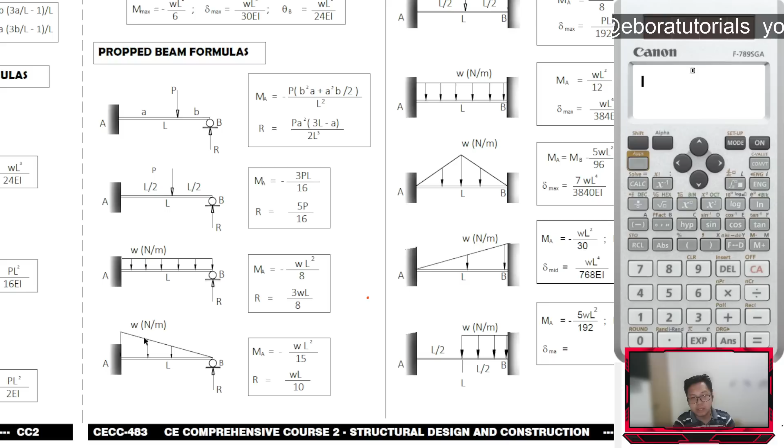Common loading is basically this: we have a concentrated load, a concentrated load at the center. Now, the concentrated load at the center, we can solve the moment at A using this equation, 3PL over 16. So we can solve the concentrated load at the center, which based on our problem is actually 25. However, notice that for the rectangular load, we don't have a shortcut.

So what do we do? This is actually indeterminate to the first degree, so it's a bit difficult. Actually, I suggest you don't memorize all of this. You only need one reaction, one equation for every beam.

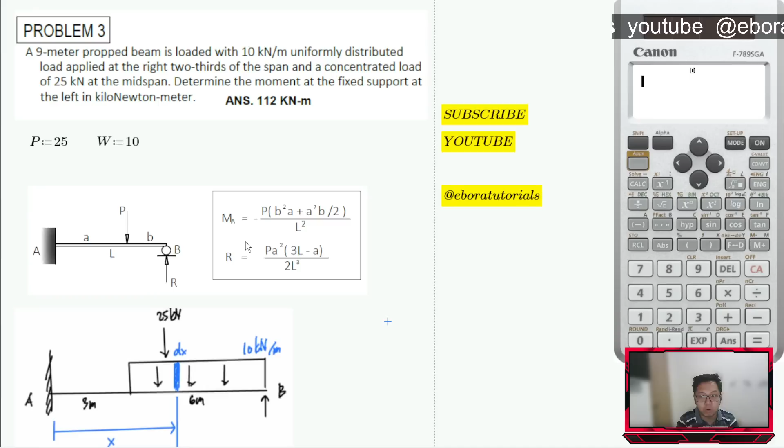So what's the use if this is all we memorize? It's simple, because if this is all we memorize, you can actually solve for any load there. It's just a combination, since we will assume all the loads are concentrated, and then we'll just use integral calculus.

So let's consider first this 25, and then we will use this equation. In fact, you do not need to memorize both.

I'll be honest, back in my time, I didn't memorize the moment formula. What I memorized was just the R, because it's simple: PA squared, 3L minus A, over 2L cubed. This one, I didn't memorize since it's a bit harder. However, once you memorize the R, after getting R, you can easily solve the moment.

Remember, this is indeterminate to the first degree, so you only need one reaction to solve the rest using equilibrium equations. I chose this reaction here because it's easier. So let's try to solve the reaction using this equation.

Considering the 25 kilonewton, I hope you agree it's at midspan, meaning its A is actually equal to half the beam. So 4.5 squared times 3 times the length, which is 9, minus A which is 4.5, over 2 times 9 cubed.

So that's it. What's the answer to that? That's actually 7.813, which is the same if we try to consider using this other equation, which is 5P over 16. See, that's 5P over 16.

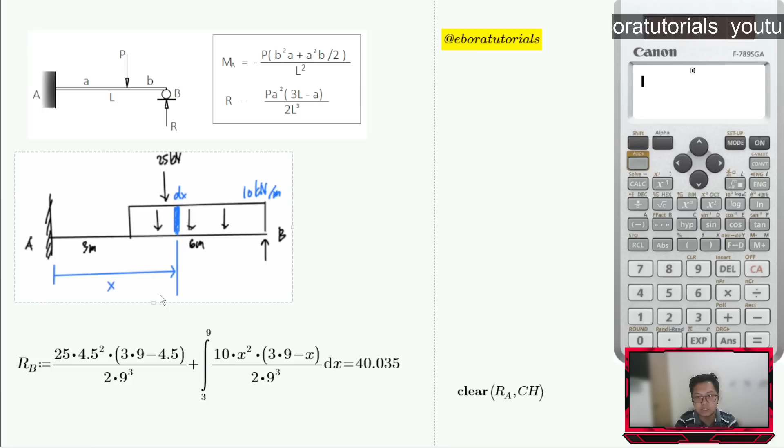So first, you need to create a coordinate system. You need to know where x starts. If this is your strip, you can start from the left or the right, depending on you. It will just change our limits. So here, I assume x will start at the fixed end.

Now what we'll do is get this equation. What is P? P is actually the total load, the resultant of the load. What's the resultant? w times dx. What's the intensity? 10. What's the width? dx. So the P must be equal to w times dx, that's the load P, the resultant of the uniformly distributed load na strip.

But for w, since this is uniform, w is equal to 10. So 10 goes here, and dx I placed on the side.

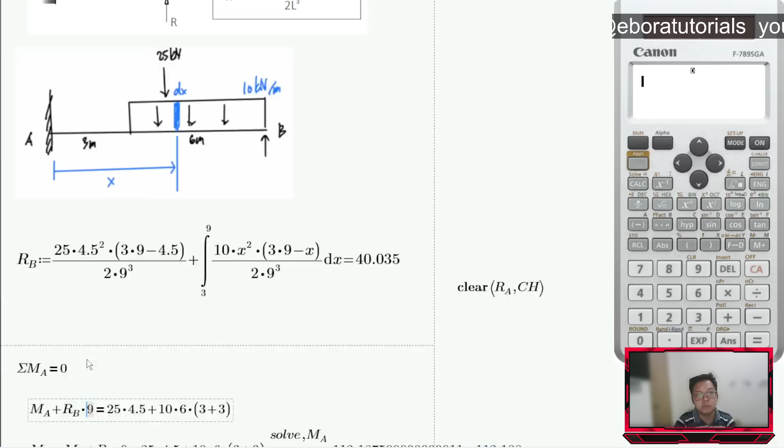But that's not what we need. We will sum up moments once you get the reaction. Sum up moments at A, clockwise equals counterclockwise. We have a negative moment here, so we have a counterclockwise one. So we have MA plus RB, and what's the moment arm of RB? That's 9, so RB times 9 must equal the clockwise moment. What's the moment arm of 25? That's 4.5 from A, so that's 25 times 4.5.

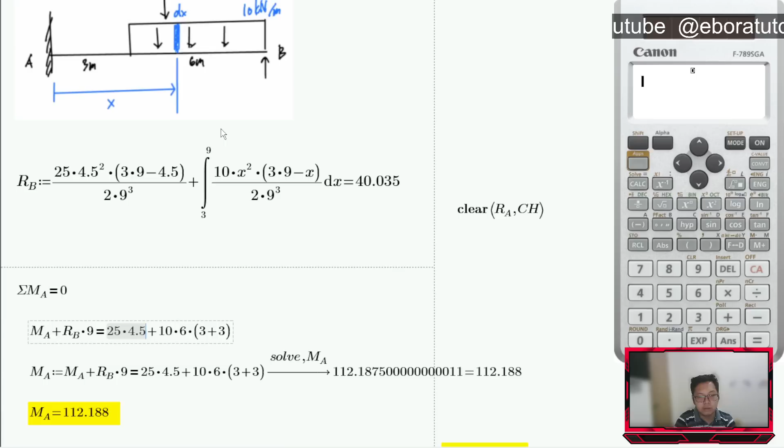This one is a uniform load, so that's 6 times 10. And what's the moment arm of this? That's actually 3 plus half of 6.

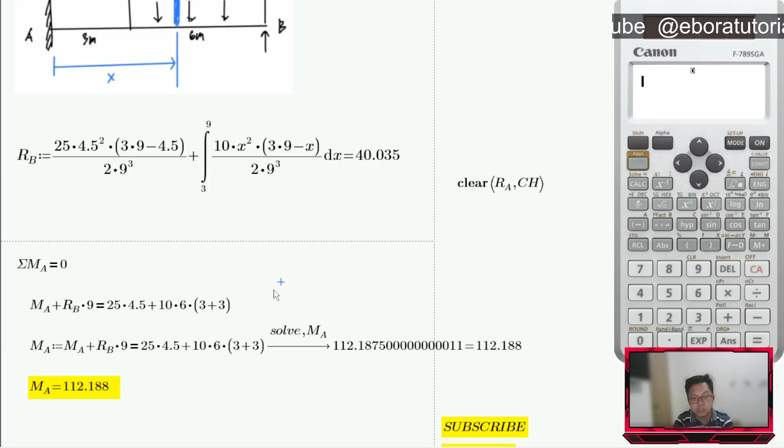So 3 plus 3. Once you have the equation, notice the only unknown here is MA. So you can solve for MA already, using your shift solve. I used my calculator for this.